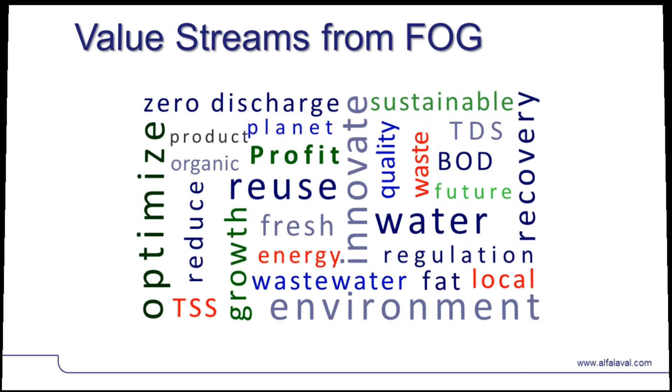Again, this is Todd Blase. I'm with Alfa Laval on the food side. I've been focusing a significant amount of my time in the protein market segment. I have a number of years in food and dairy applications and in equipment sales. So this certainly falls within my comfort zone with applications.

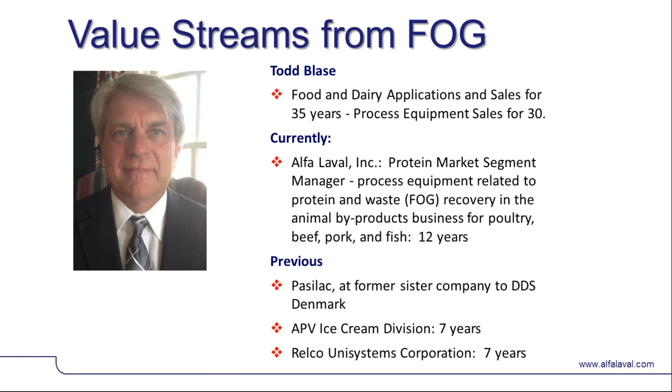As far as the agenda for today, we want to talk about the recovery or management of water in relation to the global state of emergency of water and usage. The food and beverage specifics, where we can help manage in that category. And then discuss why on-site wastewater treatment. What's the importance of that, and how can customers take advantage of that? That is by reuse, recovery, and reduction. Those 3 R's are very useful from an efficiency standpoint in plants, as well as looking at whether we can actually pay for a project by managing those.

As far as wastewater treatment for profit, we're going to discuss a case study today. We'll give some details on what we looked at and what we accomplished. We'll cover some wastewater solutions, some ideas, some different things that build the case for how we can manage reuse, recovery, and reduction.

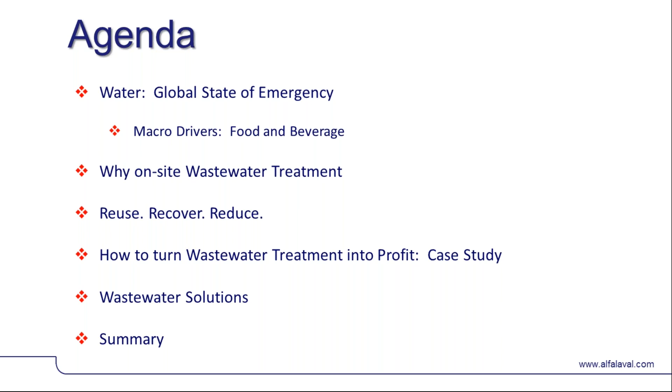The key thing that we want to focus on is waste into product. Probably a good example would be the cheese whey business. In many of our lifetimes, we've seen cheese whey go from a waste product that was spread on farm fields to now, where the value recovered from the waste material in some cases exceeds the value of the cheese produced in those facilities. And that's truly how we try to look at a lot of these applications: where can we get the best results or the best value for some of these waste products.

Coming next would be managing the waste into energy by focusing on BTU management from one end of a waste treatment to another, to make sure that we can capture some of the BTUs that exist there, and they can be used in other parts of a process facility.

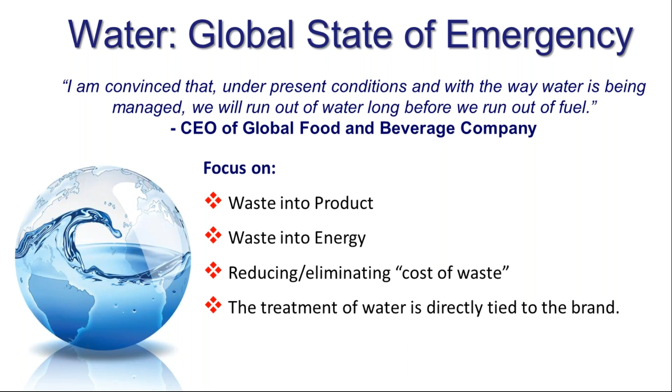Reducing and eliminating the cost of waste is only natural as we try to make value out of some of the products recovered, managing the cost of waste. Finally, the treatment of water is directly tied to reuse and recovery, simply because some of this water can be used for other parts of a process or facility by focusing in that area.

Some of the macro drivers we look at include areas where water is less available or there may be problems managing wastewater, driven by population growth, globalization, urbanization, and changing economies. Take the ability to process a specific food product and export it across the globe - it does two things: it may help water conservation in one area, but it may impede it in another. So it's about finding balance.

Climate change, certainly the change in weather from one area to the next, and the use of water in those areas - we focus on that, for example, where some of this water could be used for irrigation or for chilling.

Our declining water quantity and quality usually go together. When the water quantity is dissipating, the quality of the water also becomes more of a challenge. So we focus in those areas.

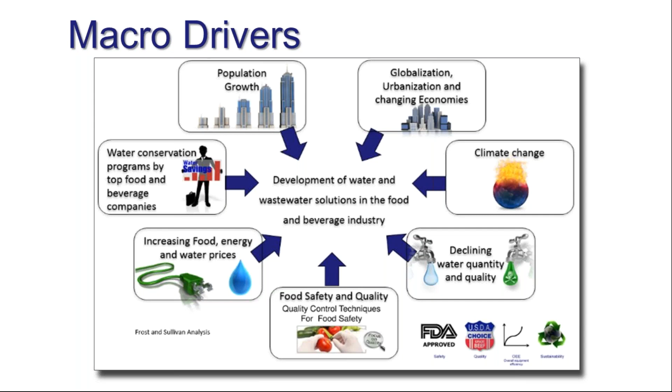When looking at industrial waste and wastewater in relation to usage, one key thing is that food and beverage accounts for 33% of the share of industrial wastewater releases in the U.S. That's one of the reasons we're focusing in this area.

That product can be used as an ingredient, which means it has to be high quality. It can be the initial cleaning of those products from the beginning, so essentially there can be a fair amount of usage there. It affects the efficiency of conveying some of the products being processed, so we want to make sure there's plenty of water available and it's good quality. Finally, being able to reuse some of that water for plant cleaning is a good aspect and a good reason to focus in this area.

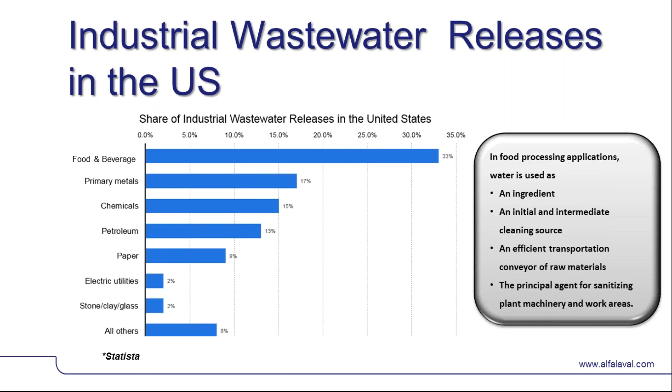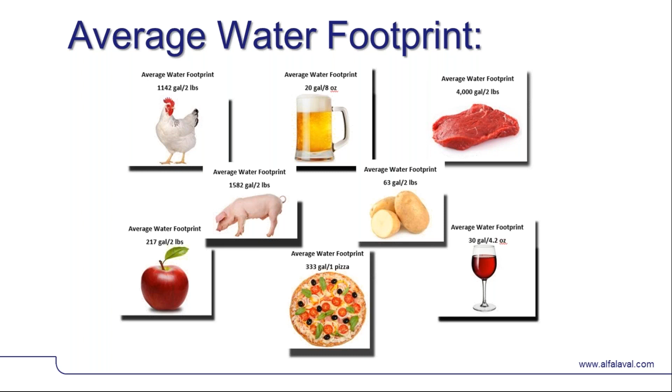So the question is, why on-site water and wastewater treatment? Why is that a good idea, or why should we entertain that as a solution? One critical thing is that many municipal wastewater plants won't accept some of the complex wastewater these processors are disposing of. If there's high FOGs, municipal wastewater plants don't want it - they want that cleaned up before they get it. And if it's not, it leads to the next issue: surcharges. Avoiding these charges is critical for the location of food processing, as well as the implementation of efficiencies - how do we avoid wastewater treatment charges.

When we look at recovering valuable resources from some of these main processes, there's a lot of really good fats and proteins that can be recovered that today are going to drain. That is a focus we have and will continue to have for managing what's being wasted, as well as managing water. Minimizing water consumption is related to that, where we're reusing water in as many places as we can within a facility.

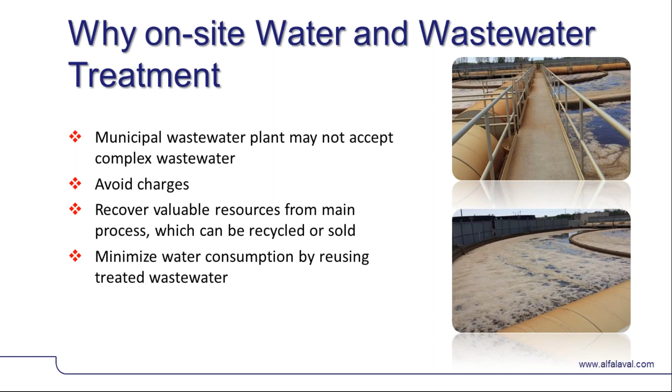Further on to the question of why we want to minimize waste for disposal: certainly the disposal costs are a real problem, and when we want to focus on how to reduce that, it comes down to the number of loads per week, the number of loads per day, and ultimately what we run into in many cases is the loads themselves - what is the moisture content, or what is composed in that waste.

Will landfill accept it, or will it be allowed to be spread across fields? Our next focus with the why on-site is BTU management. There's no reason not to use the available BTUs within a facility as much as possible, as long as it's economically feasible. The wastewater treatment capacity is, in many cases, a bottleneck on whether a plant is expanded.

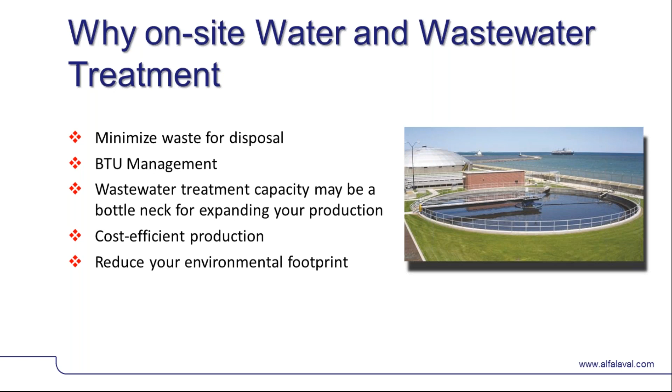The simple recovery process is reuse, recovery, and reduce. That is certainly something we try to look at continually - can we get heat recovery? Are there products that we can recover and even be used in the existing products that are produced, or would they be considered byproducts? They all add value. And then finally, by going through this exercise and reducing the amount of water that is going to waste, we're reducing that load as well.

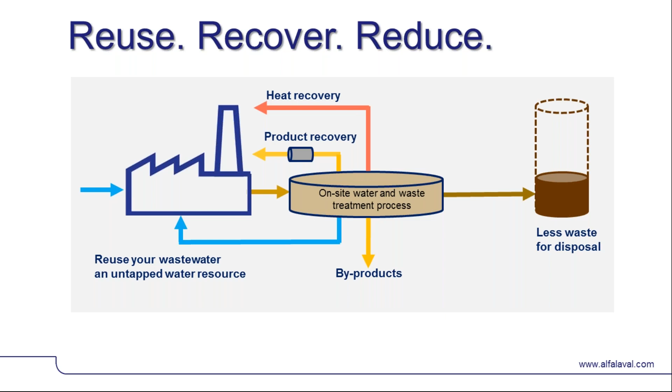The case study we want to talk about today is related to a poultry plant. This poultry plant is unique in that they have a kill facility, or kill plant, and a further processing plant - let's say a prepared foods plant - on the same facility. So the waste is going to drain from both facilities into one single wastewater treatment plant that's on site.

One of the key things is, if you look at the examples of the product in this slide, you'll see the one on the left has breading, which is its own process problem, as well as you can see it's been cooked in oil, which means there will be oil drippings going to drain, or at least some of it. The one on the right may be marinated, or there may be other treatments involved. And then continuing to the kill plant, there can be blood and a number of the waste products that come from a poultry kill plant.

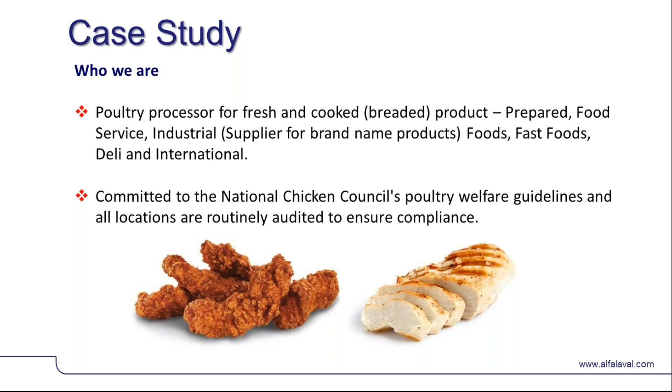In this case study, when we looked at the slaughter plant and the usage in this slaughter plant, one of the key things is the total amount of water used - 1 million to 1.5 million gallons, which is not extraordinary for a lot of these facilities. It's a range that fits well with a lot of process plants across the country.

I think the other part worth mentioning is, in this breaded product, this flour and pastry - I'll talk to you a little further about that later in this presentation. Certainly this 1 million to 1.5 million gallons of water is laden with fats, proteins, and carbohydrates as a result of washing and managing ovens. There are a number of locations within a facility where ultimately this product can end up in the drain. The waste loads determined for this case study were the traditional - BOD, TDS, COD, pH - and certainly what you would commonly see with any wastewater treatment facility.

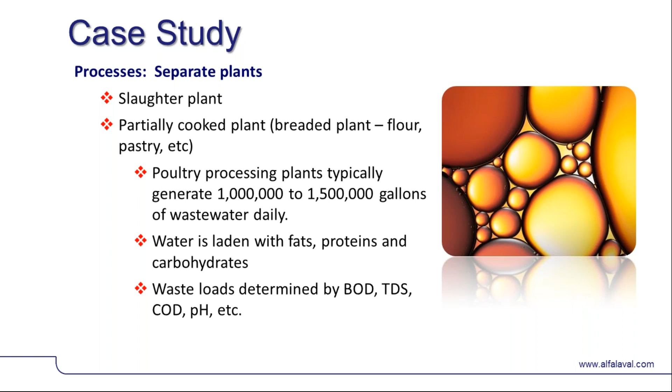With this study, one of the key things we wanted to illustrate was the beaker of oil that you see. That's what's coming off from the system we're processing. That's not a doctored product — that's something that is, you might say, straight out of the value recovery.

The key things we wanted to focus on within this facility were the cost of operation, as well as how do we ensure the recovery is happening, related to flours and all kinds of different things that are within the waste stream.

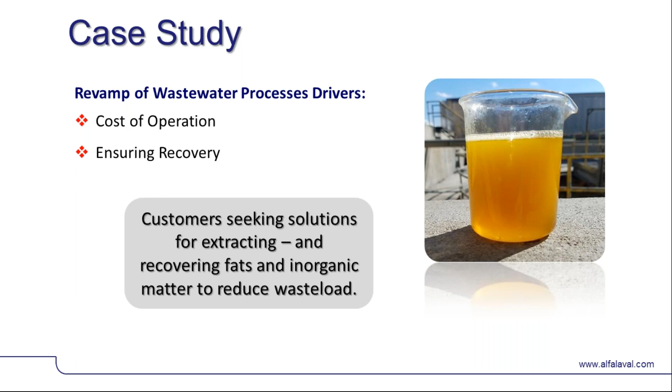In this process, we want to look at the dissolved air flotation, or DAF, which is certainly common in many of these plants, where we recover the DAF skimmings from the primary DAF.

This is then subjected to heat so that we can maximize the recovery of oil from the solids in the DAF skimmings. We have two different approaches: one is a three-phase decanter centrifuge, and the other is a two-phase decanter centrifuge with a vertical high-speed separator. Each one has its place according to the composition of the DAF skimmings. It has more to do with the recovery, and as you see, the oil that's recovered is technical grade or feed grade.

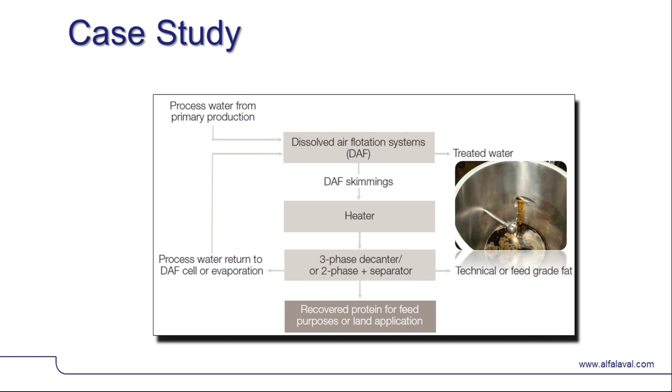A good feature with this process is that the processed water is then returned back to the DAF cell, or it can also go for evaporation, so you can essentially end the process with no waste. That's a critical feature we try to focus on when we look at the mass balance for these types of applications.

The next thing in this case study is the assessment and the revamping — what to do next or how to expand. I think the key thing with this location was they wanted to expand their facility, which means they're going to put more load on their wastewater treatment.

So it was, how can this be done, or how can it be paid for — really two key questions. When we looked at the cost of disposal for the solids, it was $35 a ton, or approximately $900 a truckload, at two truckloads a day.

The difficulty with managing truckloads is certainly managing the sludge — that's the logistics and the weather, where there's only so many times out of the year that field spreading is allowable or even acceptable for the farmers. And if it has to go to landfill, its moisture has to be at a certain level, otherwise they may still take it but charge you more. So it's really about focusing on how to manage that.

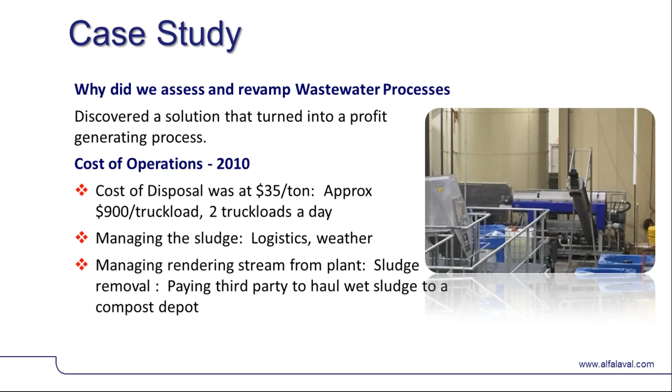As far as the further assessment, we looked at the reduction in the number of loads per week, where we brought it down from 10 all the way down to 2, which certainly reduces hauling cost and those types of related costs.

Then we have the recovery side, where we're recovering this oil or fat, and depending on the quality of the fat, it depends on where it goes. But ultimately the exercise we saw in this case was that we could recover $12,000 per load as the revenue stream for the fat, experiencing up to $160,000 a month in revenue as a result of this approach.

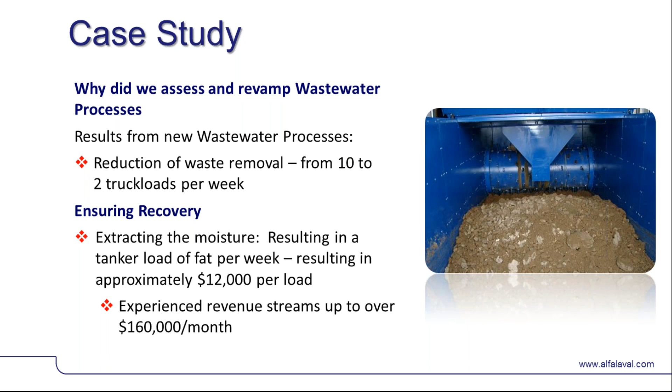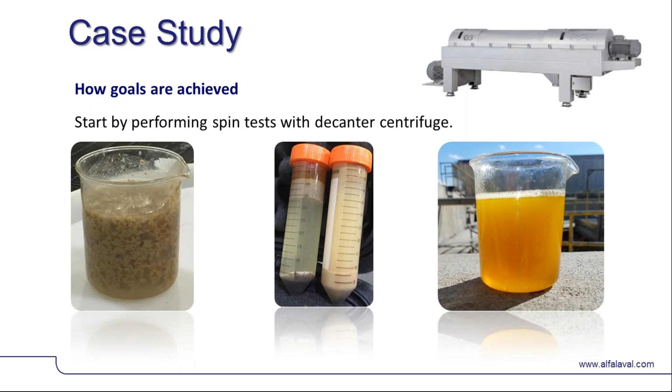Now, how do we get started? What did we look at? These are the critical things we looked at for this process: to see what our DAF skimmings were going to look like, then recover them, do some spin tests, and see the end result. This helps us with our mass balance to size the process, to size the plant, as well as to be able to predict the overall revenue for this type of application.

In this case study, there were some things that were part of the customer audit, just to make sure that they were managing the value of the recovered streams.

Each load, or let's say the oil recovered, had free fatty acid tests for each load to make sure it was complying with where the next use was, whether it was animal feed. If the free fatty acid values were too high, then that would be sold to biofuel or biodiesel application versus the feed. The fat itself, the moisture content, and then finally the pesticides and herbicides, so that we could be sure.

Be sure that anything going to be fed to animals was compliant from that side. And then, of course, your usual effluent wastewater audits, where it was BOD, COD, TSS, phosphorus, ammonia, pH, and biannually with metals.

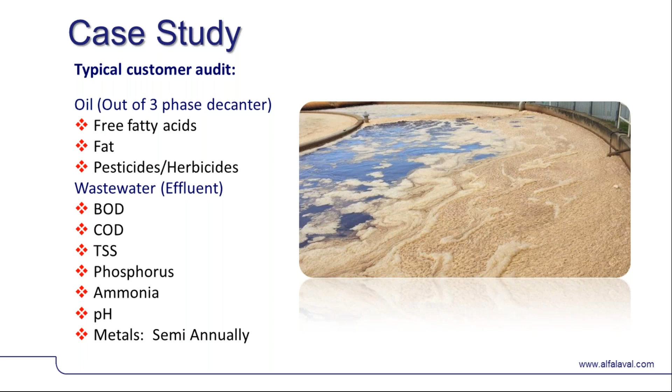So in summary, what we try to look at is that the DAF recovery system generated revenue. The revenue generated was substantial enough that it was essentially a self-funding project, simply because of the type of recoveries we were able to exercise.

In this case, the solids were also sold as animal feed, so that essentially every pound of solids as well as every pound of recovered water could be sold for a value versus a hauling cost.

So based on all of this, the revenue and essentially the success of the approach allows for a production increase as well as managing profits on both sides, not only on the production or process plant, but also on the wastewater treatment plant itself.

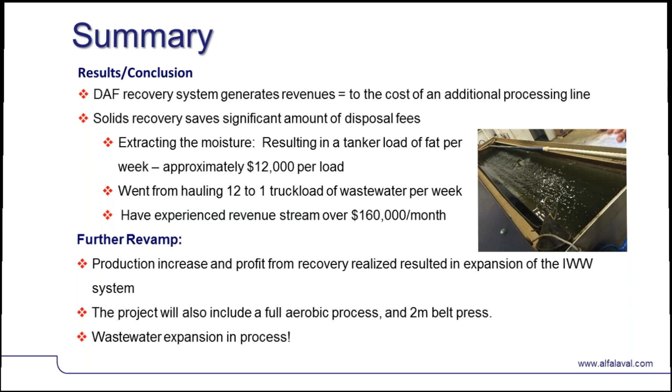There are many applications, of course, with waste where we can bring waste to value. The poultry example is just one of those that we look at.

We also look at the slop oil and oily waste, where we can convert that to high value hydrocarbons within our processes. We look at where we can recover spent wash from ethanol, FOG from a protein facility. Another one would be bacon grease, where there's very high value and high volume, where we can take advantage of that.

Coal tailings recovery, the starch recovery from potato chip or French fry production, that can not only be a value on the front end, but it also can really reduce the amount of surcharges that may be applied to a facility from a municipal treatment plant.

The treated wastewater, of course, is reused, whether for irrigation or process water for cooling towers. Essentially the key thing we want to look at within a facility is what BTUs can we recover, just like any other waste? How can we recover those BTUs?

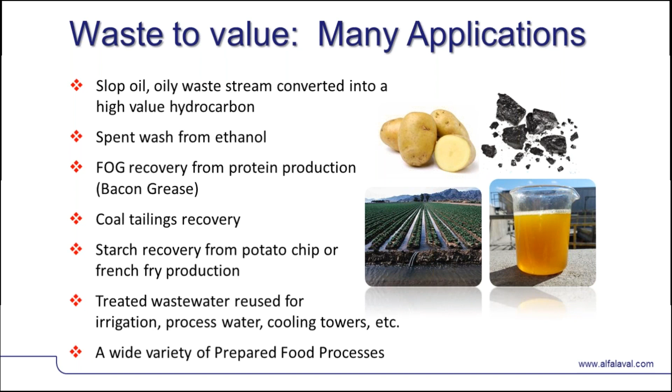just in the byproducts recovered, but also in the amount of water that's reduced or reused. So it's totally looking at the flows, and how can we concentrate in each area for the best success for the end user.

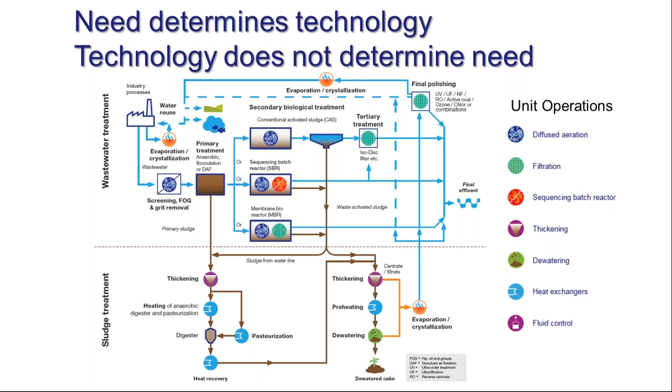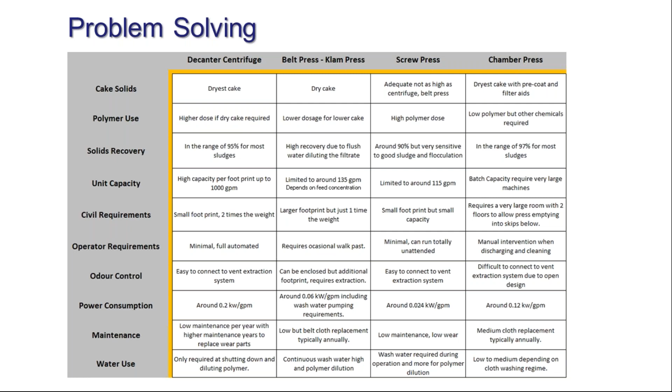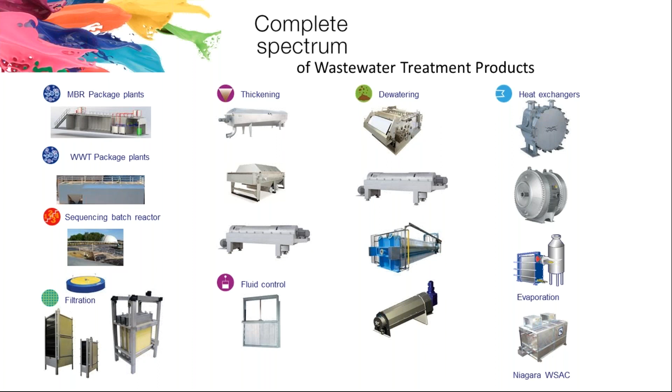When we look at reduce, recover, and reuse, we certainly want to reduce waste, and at the same time make allowances for how we can reduce water. When we look at the value of products and the products that we can recover, how can we do that? Essentially, we try to look at the entire mass balance of a facility and what we can do for recovery, and usually what plays with that is what we can do for recovery of water. Finally, with reuse, some of these products can be reused, and some of them can be made into something that might even be better than the ones on the front end. It's all down to focus.

And then the other part is water reuse. Can we use it in a chill water system? Can we use it in a cleaning area? All these types of applications.